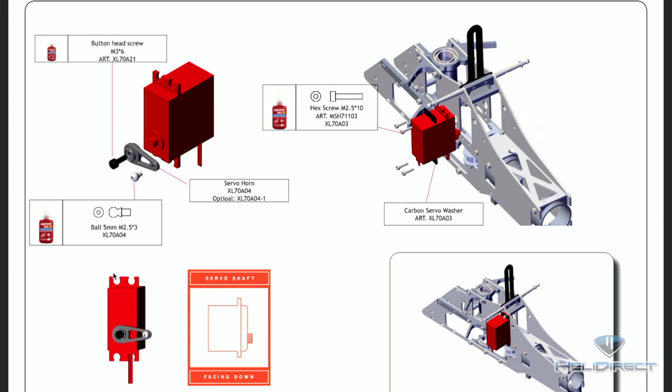So with that, let's go ahead and take a quick look at the manual here. You can see here, this is the rear cyclic servo, I believe, at this point. And then we're going to do the tail servo on the next page. And you can see we're going to get the servo facing in a downward orientation, meaning the shaft is at the bottom of the servo, and then we'll angle our servo horn to the right here at 90 degrees. So with that, let's go ahead and just mock that up.

So one of the first things you'll need is a servo tester. I have a handy dandy one here. Many of the battery checkers on the market also will have servo test capabilities. This one is a Spektrum unit I've had forever. We're going to go ahead and set this to 1520 for our cyclic servo. And we'll get this plugged in.

And here's a little trick. This little dot means that's the side the signal wire goes on, which on a Theta servo is the white wire here. And I do that so I don't have to read the tiny little lettering printed in black on black. So I'm just going to run this from left to right, back to center, just to make sure it's working, and it is. And then I'm going to orient it like so, just like it is in the manual. And when it's going downward, we want to get the servo horn here. So I'm going to try and find the spline that gets me the closest to 90 degrees, and I think that's it. And as you can see, that's not anywhere close to perfectly 90 degrees. It's close-ish, but not super close.

So we are going to go ahead now and bump our servo. So I'm going to take the Theta app on the phone. Alright, I'm going to go to the Theta app. And when you open it, you sort of get this new screen, updates about new servos and things that are coming out. But you'll see up here in the top it says parameter, and that's where we're going to want to click right now. And there are some great guides available on YouTube. The US team manager, Ting Yang Meng, has done some great videos on the subject I highly recommend for this.

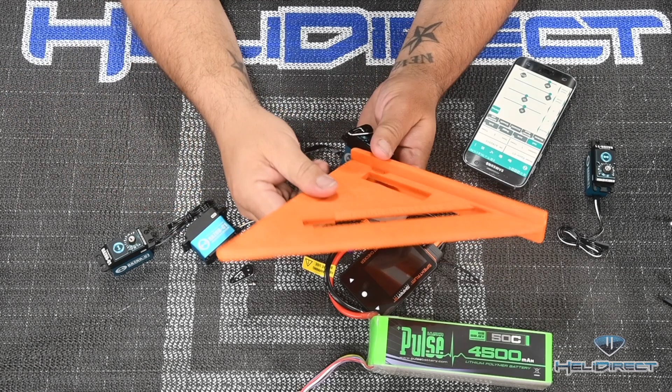And every now and then it says operation fail, in which case you just do it again, give it a try. That one says write success, so we know that's good. So now I can go ahead and set the 90 degree center point on the servo. So I'm going to run my square here.

Now the servo has a handy 90 degree point marked on the case. It's quite accurate, so I'm going to use my square lined up there, and then I'm going to get this lined up so that my square is lined up with the servo horn, and I want to be able to see the center of the square right through the window. I know this is kind of hard for you to see perfectly here, but that gives you a rough idea.

And we're going to get this. Now some folks have these cool 3D printed sort of slide-on covers that get this just a little bit more accurate, but for my purposes, this is going to get me real close. So that looks great, especially once I take the square away and just look at it again. So now what we're going to do is go ahead and power it back up so the servo reads its startup point.

And there we have it. Our servo is now set. So when it powers up, you can see it didn't move there, but this is the 90-degree point. It's just that simple. I'm going to go ahead and do that for the rest of our servos, and then we'll go ahead and get these Loctited and installed.

Okay, so we got our rearward cyclic servo, which I always want to call the elevator servo. I know some people don't like that for whatever reason, but I don't mind it. We're going to get our tail servo plugged in just a second. We're just going to get our servo tester set to 760 first. There it is. And there's that plugged in.

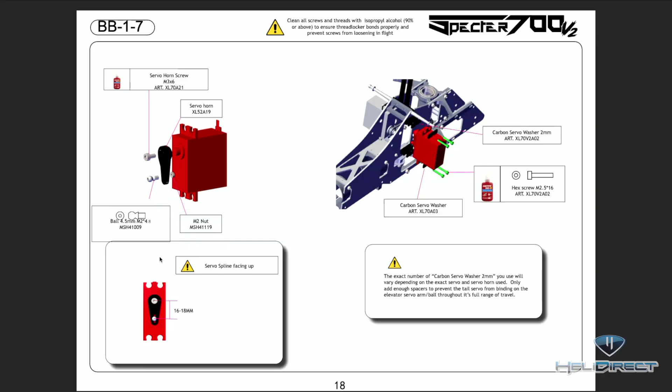So again, we're going to use a slightly different servo horn here. And looking at the manual here real quick, you can see that we're going to want the servo shaft for the tail servo at the top. And then the servo horn is going to go straight down 90 degrees. With our servo plugged into our tester, we're going to run it in all directions, make sure it's there. Now we've got it back at center.

We're going to take our servo horn and try and get it. It's going to point straight down over the body of the servo, like so. And then we want to get the one that's closest to 90 degrees, and I'm fairly certain that that's this one. And then we're going to have to now bump this servo with the app.

So it's reading the servo now. Now, you'll see it says login servo. What that means is it's the first time I've bumped this particular servo. And it's going to ask me to bump it again, and it says login success, and now it's read all the parameters. This servo is basically now registered to me. When I registered the Theta app, it logs the servo into my account, so Theta knows that I have this servo. Now, why do they do that?

The only reason they do it is not to track how many servos or anything else you want to think of. Literally, the only reason that there's this little login thing is so that, let's say you're at a big 3D competition, somebody else can't walk up to your servos with an Android phone and mess with you and reverse the servo or change your settings. This servo is now paired to this login on Theta on the app, so nobody else can tweak these servos while I'm not paying attention, for all of you people that think you're funny.

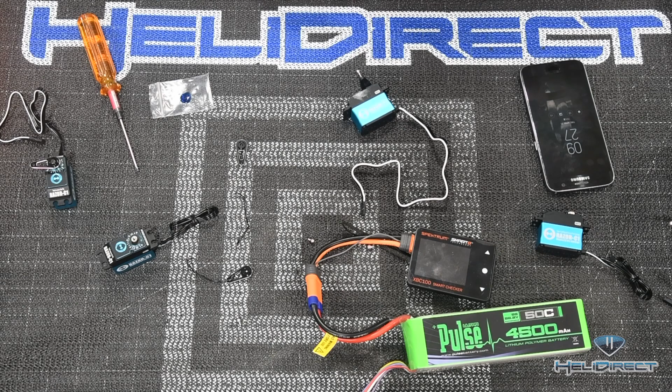So let's start with the tail servo, and in this case you're going to install a nut on the end of it. So first thing I'm going to do is just get the ball through the plastic, and it looks like it's a 4.5 millimeter here. So just going to get this to go through the horn first. Then we'll put some Loctite on it, and then we'll get the nut on the back side. Now the reason I do this is that what I don't want is Loctite on the plastic composite. Plastics in general can be made very brittle by Loctite.

So the one thing I'm going to check here is, is this a lock nut? And it sure looks like it's a lock nut. So we're not going to use any Loctite here until the nut snugs up. There we go. That is our servo ball on our tail servo. Put that aside, and then we're going to bring our Cyclic servo in.

Now, when I install balls in Cyclic servos, and it's metal to metal like it is here, these servo arms are threaded. I'm going to use red Loctite, because if the servo arm is damaged in a crash and I order a new one, it's probably going to come with a servo ball, and even if it doesn't, I'm probably going to want to replace one anyway. So I'm going to go ahead and dip this in red Loctite. I'm going to work all the extra off on my finger,

and then install it in the threaded metal servo horn here. And just snug that in, not nice and tight, but just snug it in and then give it a little bit of a something something. You don't have to go crazy tightening these things. The Loctite will do its work. And just like that, we've got our ball installed in our servo horn, and then we can go ahead and get these mounted in the fuselage.

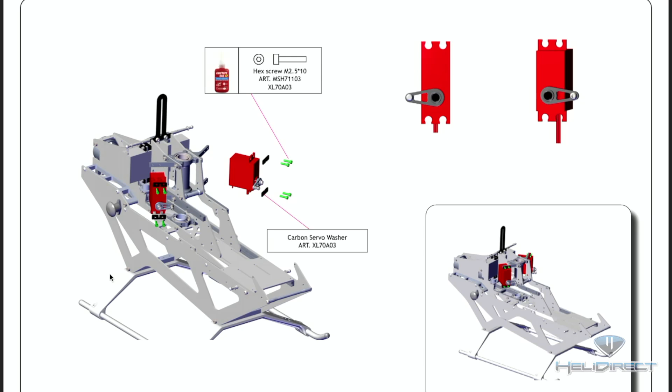You can take a look at it here, and you can see that both shafts are going to point down, and then the horns are going to go in opposite directions from each other. So let's go ahead and get those done at this same point now. I'm going to go ahead and take these two servos, tuck them aside for much later in the build, but they're done as well. So while we had everything out, we just went ahead and did them, and then we'll pull in our Cyclic and tail servo and our section of the fuselage and get that going. I'm just going to go ahead and clean up the bench of our servo tester and pieces, and then we'll be right back.

Okay, so we're going to start with our Cyclic servo. This is the Razer C1. And then it's going to go, just like we saw in the manual, with the servo horn towards the bottom of our frame and the ball towards the front of the frame this way. So we're going to take it in this direction and slide it into the fuselage.

Now, what I'm going to do here is just get our servos started in opposite corners first, and then I'll worry about getting all 4 screws in, and then I'll worry about tightening them down, because as you install the servos, you may have to loosen some other pieces.

These servos are going into pieces we've already installed. So in the case of up here, it's the metal plate at the bottom of our anti-rotation piece. And here we're going into, at the bottom, the top of our tensioner pulleys into that bracket. And I may have to loosen this guy or these two guys and the idler pulley here, and kind of move it around a bit to get this to go.

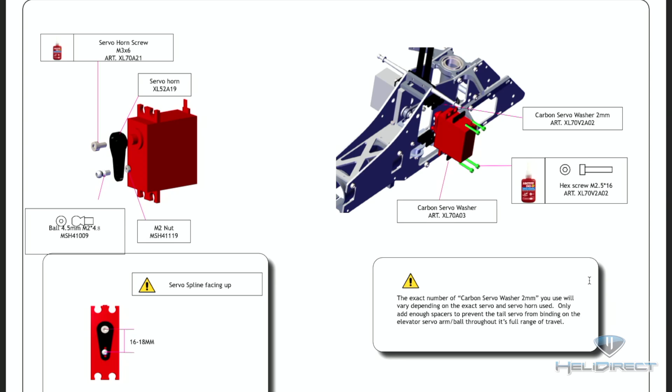So there's a few things to point out here in this manual. First is for your tail servo horn, they point out you want about 16 to 18 millimeters as a guide, so make sure your horn fits those requirements. And then if you read this warning here, basically what it says is depending on the tail servo you use, and we'll switch to the overhead camera here, there may be some interactions between the tail servo, which goes with the horn facing downward in here, and the cyclic servo.

So you can kind of see it, see the best camera angle here. Right now, if I were to install this stock, I actually can't. The ball is hitting the other servo horn in here, and you can see that's hitting. So what XL gives you in the kit is these spacers, and these are meant to go on this side of the frame, here and here.

Obviously you put them on both sides, and you can use as many as it takes, depending on your servo and the servo horns, to space this servo enough such that the servo horns won't hit each other, and that the tail push rod can move freely. And then you want to check this at all extremes, so you'll move your cyclic servo horn. It's really difficult to get a good camera angle in here, but you'll move your horn all the way up, all the way down, and just check interactions.

Imagine you've got a tail servo swinging far one way, and the other servo the other way. You need to make sure that the balls won't hit each other. So it's not just about this hitting here, right above the spline. It's about that the balls don't hit each other. So I'm going to muck about with that a little bit and figure out how many spacers. It looks like it's easily 2 or 3. They give you a total of 6, so you could take as many as 3, and it feels like mine might. I'm going to play with this a little bit, and then I'll be back once I figure it out.

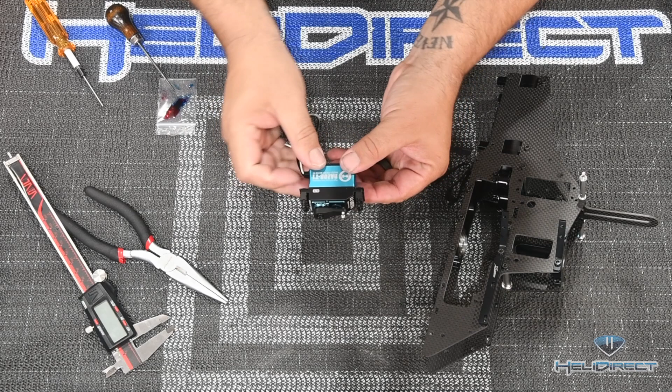Okay, so in my instance, I needed 3 washers per side, and I'm going to go ahead and now install this here. I had to sort of stack it all up because getting all these washers in once this thing's in place is going to be really hard, so I'm just going to get each screw started in turn just a little bit, and then work my way around, because I can't get them too deep until I've got the other side aligned and in as well. I'm going to go around the horn, a couple turns at a time in each position.

This is kind of fussy, honestly, to get 3 washers on here with the bolts through and Loctite in there and get it all aligned. But I think stacking it all, Loctiting it all, and then going around the horn is definitely the way to go. Okay, and with that, our tail servo is in there. It's not going anywhere. Now, let's make sure they can't hit each other in here. So again, we're in this weird camera angle. I'm trying to get you in here.

There we go. So now you see the two... Let me get something other than my fat fingers in there. Servo balls in here. Here we go. And basically what we need to make sure is that the cyclic servo can go through its full range of travel and not be hit by the tail servo when it swings back this way.

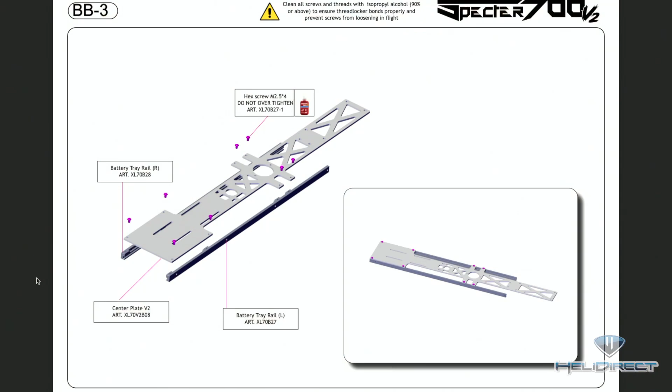So with that, we've got our two servos installed, one tail servo, one cyclic servo, and we are ready to move on to the next step. So the next step, if we take a look at the manual here, is to work on our battery tray system. The first thing we're going to do is take all these tiny bolts out of the top of our battery tray piece, get those cleaned, and then reassemble all the bolts going down into the battery rails here. So I'm going to get those cleaned, Loctited and dropped in, and we'll come back when we have this as a finished assembly. Pretty straightforward step.

Okay, so that was pretty straightforward. Only thing I would say is get all the screws started one at a time before you drive them home, and then get all the top ones seated. I'm going to pull all the screws out of the side and get those cleaned as well in preparation for what's next. I'll be right back. Okay, so the next step, we're going to take this battery tray piece and join it with our frame assembly. You can see it's going to go in this kind of alignment, and it essentially will bolt through just like so. Let's take a quick look at the manual. You can see essentially the same thing.

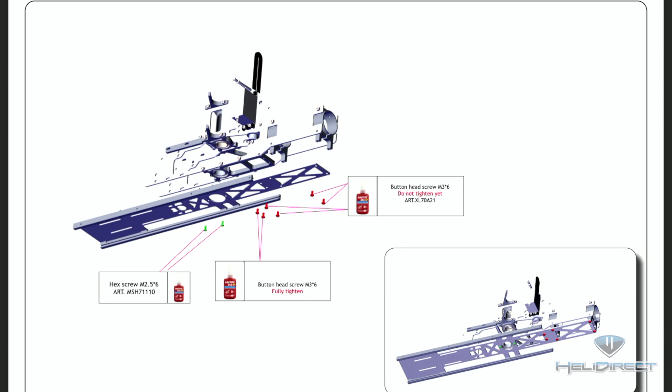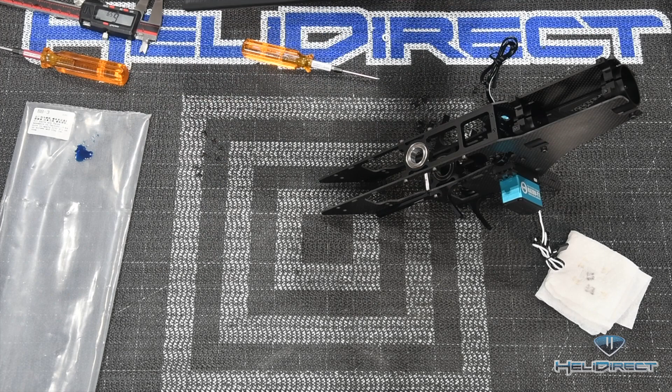Just FYI, some of the screws that come up into the bottom of the upper frame assembly were actually in those frame pieces earlier. You may have pulled them out, cleaned them and put them back in, which is what I did. I like to keep things together. If you can't find the screws, they may be in these plates already. So pull these two screws out, these were already in the plate. Let's get some Loctite going, and then get this assembly on there. I've already pulled the screws out of the side of the battery tray assembly and cleaned them. The frame rails will go down, and we're going to have to finagle this. Let's get a little Loctite on one of our button head screws. These are likely button heads so that they'll clear the battery and the tray when it slides in.

So again, anytime you have a step with a whole lot of screws being installed, it pays to just lightly put them in and wait until we get a lot more in and aligned before we snug anything up. They've given you bigger slots for these screws at the back, so there's a lot more leeway in those. When we get to these two here, the tolerances get a lot tighter. That's another reason not to tighten the ones in the back too much, because you want the position of this thing set by the tighter tolerance screws. But getting a few of these loosely in there helps get this going.

So your 6 button heads go towards the back of the heli here. Whoops. Another good reason to use a textured mat: the screws don't go anywhere when you drop them. Generally right where you left them, unless you're very unlucky. And in total in this step we're going to put 8 screws in.

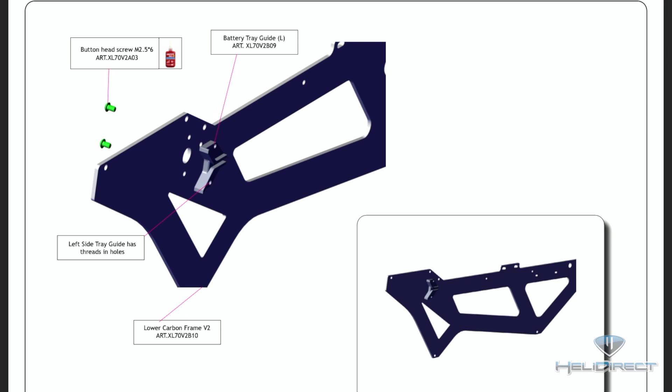So take one, set the other one aside, and then we're going to grab these battery tray guides here, and take the correct one and attach it to what will become our left side tray guide. So if we take a look at the manual here, you can see that we are going to be attaching this piece here.

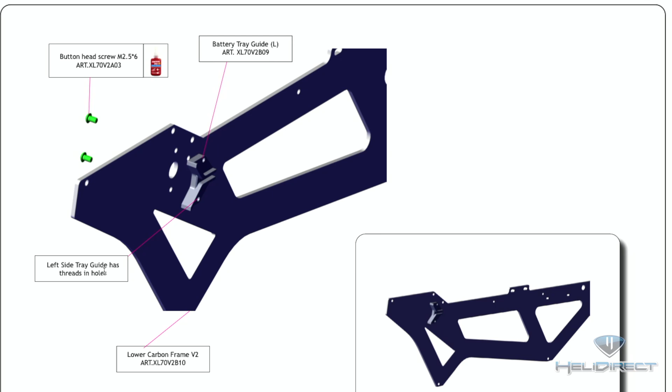Now, the interesting thing about these is if we go to the next page, you can see we're putting the other one on here as well. And one of them is going to have threads and one of them is not. The right side guide uses no threads because the bolts go through it and then bolt into this retaining clip, it looks like. So on the left side, we want the tray guide that has threads in the holes. So that's what we're going to go ahead and look for here.

So we've got our two tray guides here, and I want to find the one that has threads in the holes. That looks like this one. So we'll go ahead and take the bolts out of it. So the one with bolts in it is the one you want for this first step on the left side of the frame. Go ahead and take these out, and then we'll clean them real quick here.

And just to show you that I actually do clean every last single bolt, every now and then I'll do one on camera. Since there's just two here, we can do it. So I just put a little acetone on a paper towel and then run the screws through it. And then we've already got some Loctite going here. So let's go ahead and orient this here. Just looking at the pretty picture here, looks like it's going to go like so.

Just going to loosely, you can see there's a hole here for the screws. So that's going to go like that. Screws are going to come through the opposite side into here. So let's go ahead and get some Loctite on these guys. The screws go through the upper and lower holes here. So we'll put the screws through, and then the guide goes this way. I'll show you in just a second here. Just got to get this screw started.

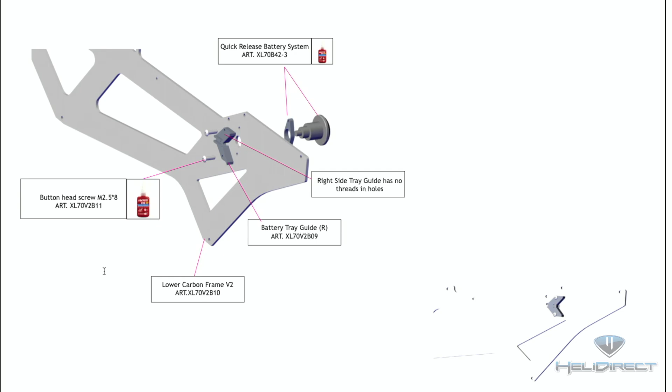And again, I always orient the parts in reality the same way as they are in the manual, so we can take a quick look. We see the pin goes through. We can see that the bracket runs up and down, and then the jaw points towards the outside like this. So here's our jaw pointing towards the back. We've got our bracket running up and down. Let me get the screws cleaned, and then we'll be able to show you how this all goes together.

Again, I know people have a lot of different preferences for cleaning bolts, and some use oil tolerant Loctites and some use orange Loctite, and there's lots of ways to do this. This is just how I decide to do it. So in this case, the bolts are going to go the other direction. Last time we went from the outside of the frame into our battery tray alignment guide. Now we're going to go from the inside of the frame towards the outside of the frame, and then we're going to go into this guy.

Get it into our bracket here, and then I'll snug these up, and then I'll show you what this looks like, and we'll talk about that all important tip. Okay, so this is what this looks like now. So we've got our battery tray spring release piece. See, it comes this way. And then our alignment guide with the open end of this jaw towards the back of the frame here.

Now, here's the all important tip, and this is not called out in the manual, and it really should be, XL Power, if you're watching this. This guy here, the spring clip, these threads right here that screw in, right? You'll screw this in all the way. You need to put red Loctite on this. When you buy this assembly, it comes all together. There's no reason not to permanently bond it.

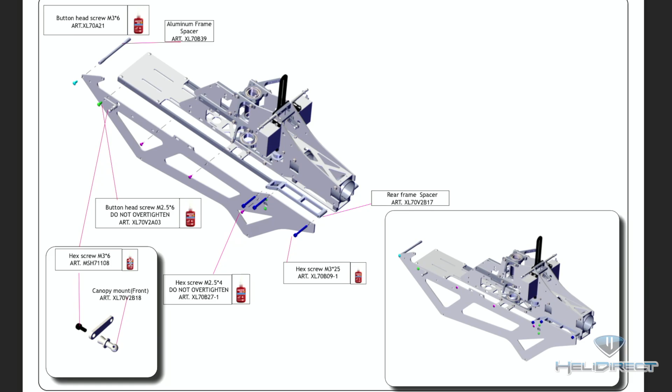So before we dig into the step, just a quick note about our front canopy retention pins. So these two pins here mount to these little carbon sort of oval pieces, and then attach to our side frames. Now the one time I'm going to deviate from the manual is I'm actually using these canopy magnetic mounts.

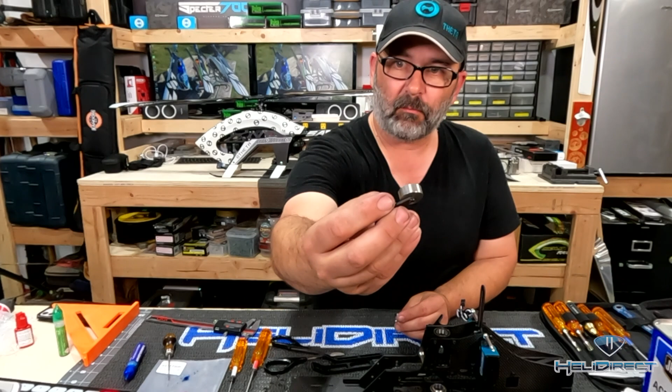So they go in the exact same spot. Essentially this magnet bolts in right where that post would have bolted in, and then it just attaches the front of the canopy via magnets as well, which just makes it easier to get on and off. So slight deviation with mine versus stock, but these canopy pins are well called out in the manual. So I'm going to go ahead and set these aside and get to cleaning bolts, and then we'll come back and start putting all this stuff together.

Alright, this next step is not hard, but you got to be kind of slow and methodical and make sure you're lining things up in all the right places. So let's go ahead and dig into it now that I've got everything lined up. So first thing I want to do is I want to grab my right side frame, and I've oriented my upper frame the same way it is in the manual, and we've got our side frame with the hook set in the same direction as the manual, so we've got that all good here.

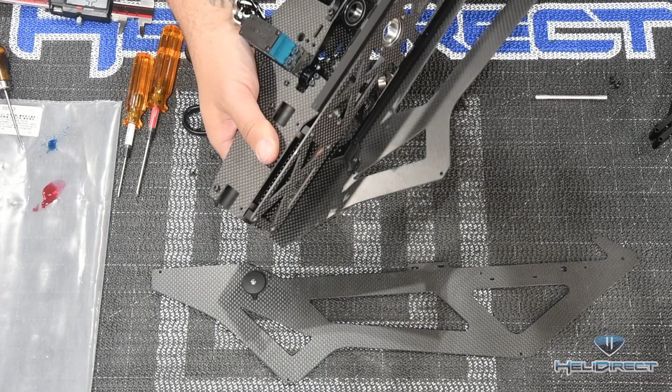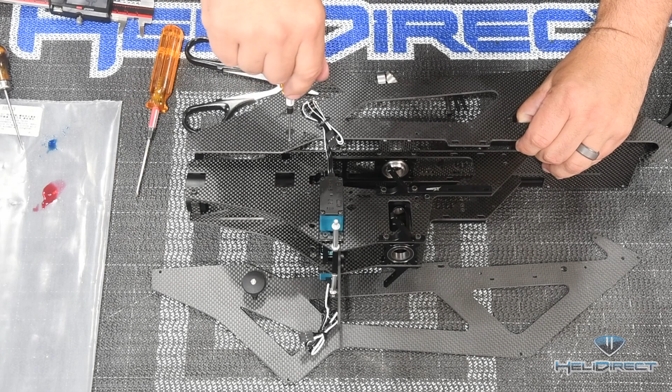So I'm going to kind of rotate this on its side in hopes of this starting to make sense. And what you can start to see is how this is going to go together. What needs to happen is this tray, the whole piece is going to kind of interlock such that it hits the guides and these go in, but then we've got to get all these little screws and bolts to line up as well, and it's not quite going. So I'm going to go ahead and loosen these two bolts just a little as we get this in. Tuck that wire out of the way to help you guys see things a little better, and this is started. There we go. Now I can get this to line up properly.

So what I'm going to do is take some of these little tiny screws and just get one of these pinned such that it's in the right spot. So we get this guy right here. And this is just going to do a lot to help hold things in place. Of course, it doesn't want to go in for some reason. Am I in the right hole? Yep. Button head should be right here, lined up with the hole. We'll get this one in. Alright, so again, I'm going to leave that loose. I need another one of these tiny little button heads that's going to go right here. And then we'll start adding in our angled spacer next.

And it's important to note that the other side of the frame uses some different hardware and bolts in some of the same locations, so they're not identical. Went in first try that time. Alright, so I got these two loose here. This third guy here gets another one of these teeny guys. Don't be shy making puddles of Loctite to work with. Honestly, I throw out all my tubes after about a year because Loctite does expire over time. And I've never finished a tube, and I've built many helis in the same year. So don't let that get you.

Just go through here and into this barrel bolt. One thing I didn't see, usually these barrel bolts have a hole in them so you can hold them with something while you tighten them, but we'll just hold it with our hands. A little extra Loctite there. Alright, so just quick look at the manual here. We got these 3 bolts here, we got all our little guys here, and that's good to go. So I'm going to go ahead and flip this over, and then we'll take a quick look at the next page of the manual here.

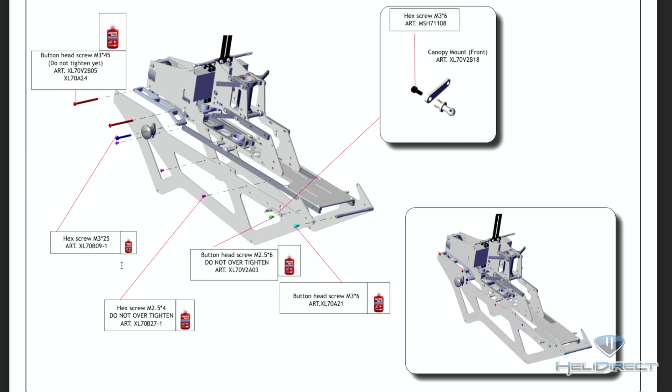Okay, so looking at the manual on the next page, you can see pretty similar layout. However, when we get to the back, the size of the bolts change. You can see those red bolts in the back. Those are M3 by 45s, and we use only 1 of the 3 by 25 there. So let's go ahead and get things going here.

The pin here will obviously go on the outside. We may have the same difficulty with the alignment with this guy, so, well, I guess let's try it first. See if we get lucky in terms of alignment with our little holes here. This side just about went perfectly right away. So yeah, no need to loosen it on this side. That's all lining up great. So let's go ahead and get one of these tiny guys in as kind of an alignment pin to start holding things together. So we get some Loctite on this guy, and we'll get one of these guys in.

The same one on the other side was a little fussy. Try the front hole. Just make sure our pins are aligned here and our... Oh, they're not. That's what's going on there. So it's probably nearly impossible for you to see, but the tray has to align perfectly with the alignment guide. So I'm going to go ahead and loosen this guy. Probably have to take it all the way out.

And so what's happening is these two little jaws here have to, let me get it in some better light, there we go, have to go right into the rail. So you gotta kind of flip it over, get them aligned well. There we go, that's better. So we'll have a good alignment there. Let's go ahead and resync that guy. Okay. I think we should be good now. We'll know for sure quickly.

And that's kind of the nice thing about starting with these little screws, is that if you're not aligned, you will quickly know. They don't have a whole lot of tolerance. All right, let's drop the front one in. That one went right in that time, much better. Okay, that's a good sign. Again, when you're building one of these things, take your time. If something is not aligned, it's for a reason. So stop, pause, look around, figure it out. Don't just go hammy on it and try and get it done.

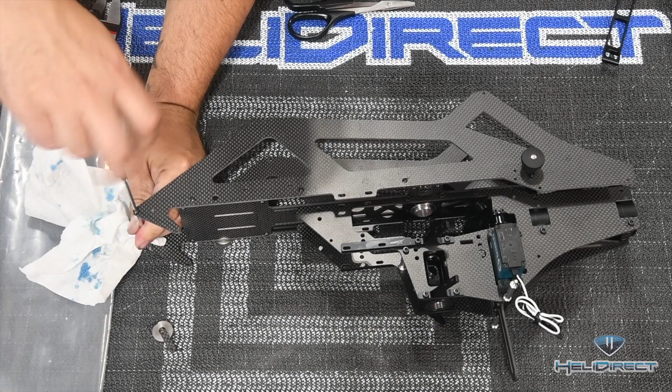Let's get our canopy screw, which is stuck to our magnet conveniently. Right here. That's better. So there's our canopy guy. We got these guys all done and tightened. And now we got to do the spacer piece. So here's where things differ from the other side. We've got these two giant 45mm long bolts, and these will go in these two top positions, and then the same 25mm bolt that we used on the other side will go in that position. So let's get the 25mm bolt dropped in the front position here.

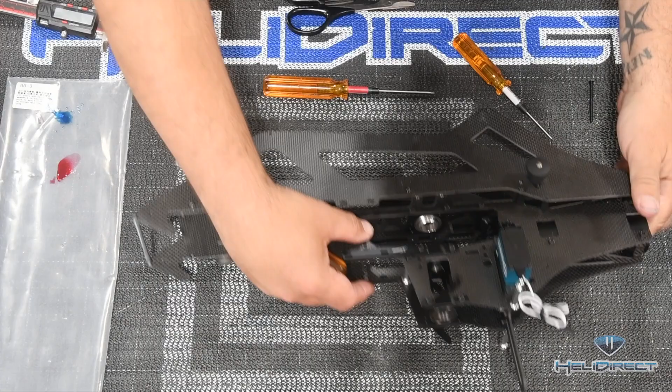What this bolt is going to be doing, if you look at the length of it here, it's actually going to be what tightens the boom clamp. So I bet there's a note in the manual here that says don't tighten these. So it's actually going to go through this spacer and then across this bridge here, and eventually we'll tighten it down and it'll clamp onto the boom. So we'll put some Loctite on it. A little bit more of the thread will get Loctite on it here.

Get this in there. And I'm not going to go crazy tightening this bolt because obviously I need to be able to get the tail boom in, so as soon as I feel it stop, I'm going to snug it, and we'll just break that Loctite pretty easily when it comes time to install the boom another day. Not going to get to that tonight.

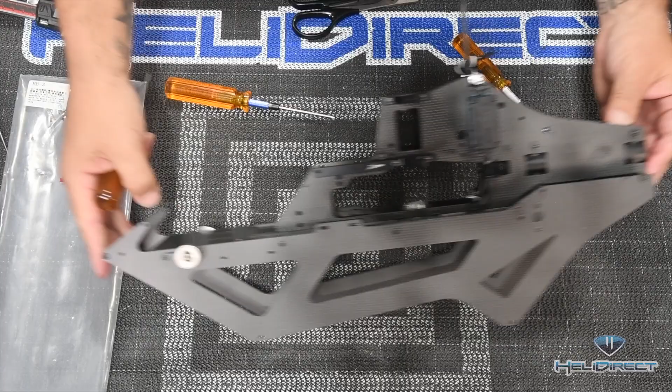And then again, this guy, same thing, it goes all the way through into the boom clamps. We're just going to stop right there rather than snug it up. And with that, it's starting to look like a helicopter. We got something that approximates upper and lower frames here, and it's looking good.

Okay, a quick note about skids. There are two kinds of people in this world. Alright, not really, but let's have a little fun here.

So a bunch of skid parts here. The skids that come with the kit are black landing gear, black skids. I'm just not a black skids guy. I'm a white skids guy. So I've got these. I ordered them when I ordered the kit, so I would have them ready. So these are going in the spare parts box, or on the floor. And I'm going to go ahead and get these white skids. So again, these aren't stock. This is a personal preference thing. There's no difference between them, but I'm going to go with white skids on mine.

All right, landing gear. Super straightforward. You take these little blocks. You bolt them to the top of the skids. Make sure the XL Power logo is facing to the front of the helicopter and upright. So I'm going to go ahead and get these bolts in, and then we're going to go ahead and install them on the frame.

Okay, one quick note: keep all of the bolts on your skids completely loose until you have everything installed and you tighten the skid pipes into the skids, and then I start working around and going back and tightening everything else. So these little black metal bars here on the top are super loose. In fact, this one's actually a little tighter than I want it to be, so that I've got plenty of alignment room to keep everything loose. So with that, the next step calls for us to go ahead and get these bolted into the frame. So I'm going to grab that and we'll take care of that.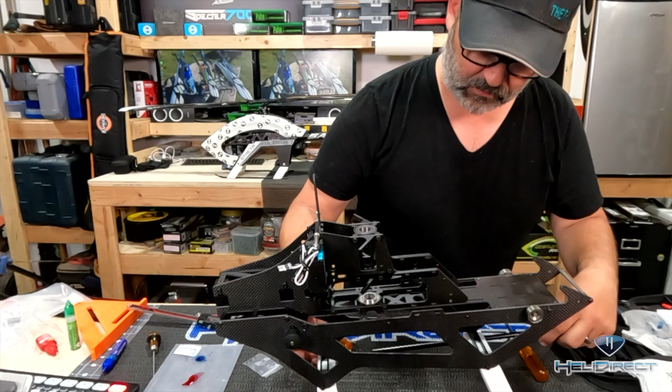Alright, so now we can go ahead and slide our skid pipes in. And just kind of slap them in there real quick. And then we'll work on finessing later. So, at this point, I've got the skids in. Let me take you to an overhead here. So I've got the skids in. They're super loose, but they're in enough that,

boy, it's funny. There's something about the angle of the camera that makes these skid angles look like they're not the same. I assure you they are. When you look at it from some different angles here, you can see, yeah, at that angle they look the same. For whatever reason in the overhead, something in the lensing makes them look off, but they're not.

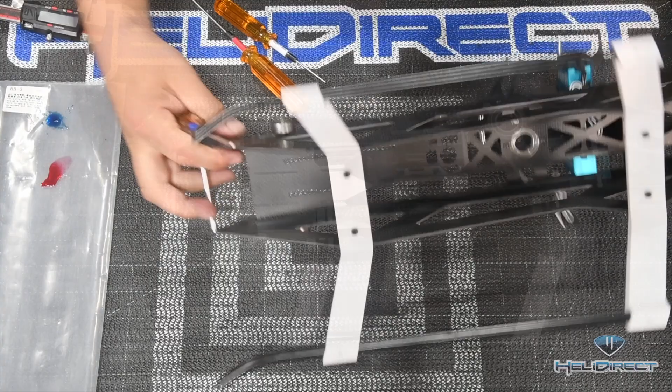So now that I have the skid pipes in, I'm going to go ahead and tighten our bolts, because this is enough to get the skids in alignment, and I can go ahead and tighten up. So now I got the other side around. Again, skids aren't tightened yet, but I'm going to go ahead and tighten these bolts. Then I'm going to flip it this way, and I'm going to go ahead and tighten the 4 bolts here at the bottom. So we'll go ahead and get these tightened. Again, I just wanted to wait till I had the pipes in here. We'll set the actual pipe position in just a second.

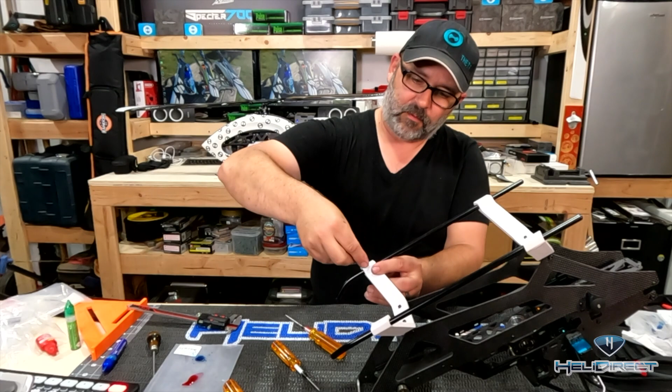Now for my least favorite part of a helicopter build. I hate putting the grub screws in the skids. It's a pain. They never seem to want to go in for me. I don't know. Everybody has that one step that they can't stand. Okay, so I'm going to use this guy because it's just a little easier to get stuff started. Again, I still haven't positioned my skids. All I'm going to do right now is try and get these stupid grub screws. Helicopter manufacturers, if you're listening and you have a better idea than this, I'm all ears. I want to keep the skids loose, but I want to get all 4 of these started.

Alright, so now we're going to flip this back over, and we're going to go do that dance where we try and get the skids so that they look good, one, and that we like how much of the sort of tail is sticking out of the skid here. So we're going to decide how much of that we want, and then we're going to measure it, and then we're going to match it on the other side, and then we have to decide whether we want our skid pipes straight up, or toed in a little, which is what I usually like. It's just aesthetic. It makes absolutely no difference, unless maybe you're doing sliding autos. There might be a way you like better than the other. But people will make fun of you if your skids are not the same length.

So take your caliper, figure out which side aesthetically you like. This side looks good to me. I'm not overly fussy. I tend to like a little bit more of the skids to stick out the back. And that just means that when you take the battery pack out, it has a little bit more skid to kind of lean on before it falls over. Alright, so somehow we managed with exactly 51 millimeters sticking out. So we're going to set the other side. Again, this is also personal preference. And that's our other side perfectly matched.

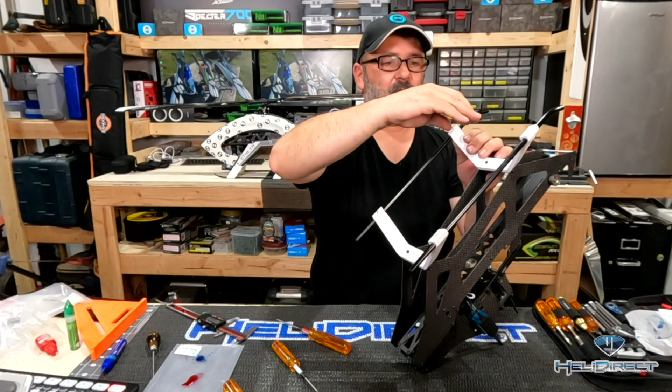Alright, now I've just got to match the toe in. I've got them the same depth, but I want to turn the skids in the same amount. That looks symmetrical to me. Then I'll go ahead and tighten this side. And then the last thing I'll do once I get these tight is I just put a little dab of medium CA in behind the screw. It just kind of helps lock it in place. But before we do that, we got to put it on its skids and take a picture or two. Throw it on the Hangout, right?

So now we have, let's move a little further back so it shows up on camera, a helicopter sitting on its skids. So, it's starting to look like a heli. Next up after here is to add some more servos, but it's close to midnight here on the East Coast, so we're going to call it a day here. That's it for episode 3, and we have ourselves a heli sitting on its skids.